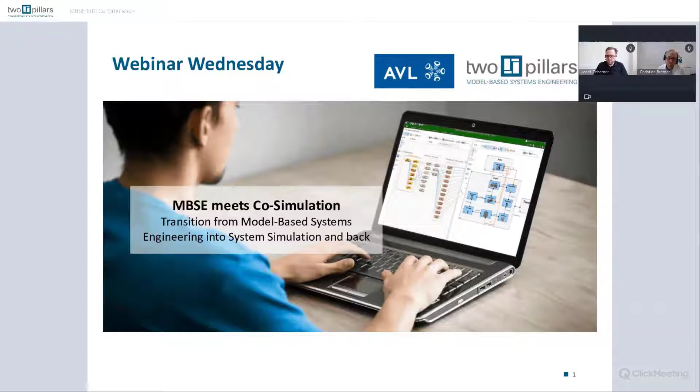The reason for this webinar is that we are actually asked by customers several times, how do we connect systems engineering with co-simulation, or simulation and test beds and this kind of thing. So we decided to investigate this topic and analyze a bit how we merge model-based systems engineering and system simulation. My name is Christian Bremer, I'm Managing Director at Two Pillars. And Joe, please, maybe you want to say a few words about yourself.

Thank you, Christian, and thank you for the invitation, and hello everyone. I'm from AVL, the largest independent company for development, simulation, and testing in the automotive industry, and also in other sectors. I'm chief engineer there, focusing on digital process innovation, so I help our customers introduce model-based development and virtualization, for example.

Thank you. All right, so let's have a look at the agenda for today. We will start with an introduction to MBSE and system simulation — what are our thoughts, what are our concepts. Secondly, the main part of this webinar shall be a demonstration; we will go into the tools, iQUAVIS and model.CONNECT, and show how this process and the integration work. Third, we will close this meeting with a summary and outlook about the next steps.

So Joe, maybe first give us an overview on motivation, from your point of view. Thank you, very short motivation here. When we look at the vehicle development process, or any product development process, we typically have this product-structure-driven level here, this upper level that we see.

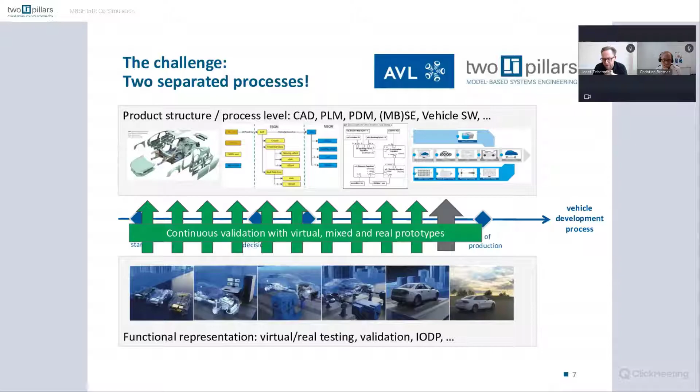Christian: Yes, so what is the general thinking? When we now place these two worlds, iQUAVIS and model.CONNECT, where are the connections actually? The first point, maybe the obvious one, is the system architecture. In iQUAVIS we have a system structure, a description of how the system works, and obviously we need to take this model and transform it into a system simulation.

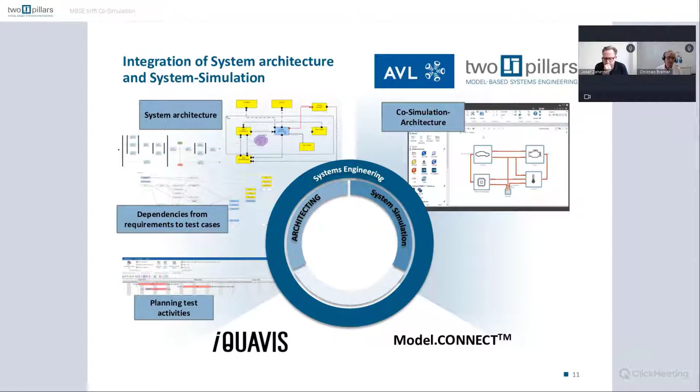However, looking at the practical process, we saw that the simulation model itself does not fulfill a purpose if there is not a question in the first place. We need a question or a test case that we need to answer in order to create our system model in the system simulation. So the second thing is that on the iQUAVIS side, we have the dependencies from requirements to test cases, and this is the knowledge we also have to bring into this consideration.

And third, we also have a dimension of planning these test activities — this is also a systems engineering task at the end of the day. It means we also have to integrate this into the loop of the system simulation by having an automated execution of these co-simulation orders. By this, we close the systems engineering loop, where we have the architecting part, the system simulation, and then the feedback. This is the idea.

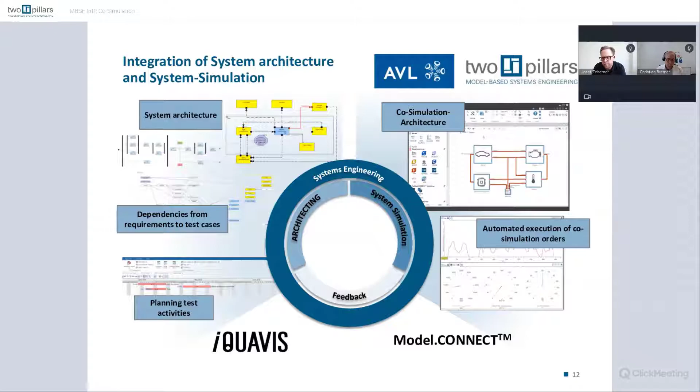Okay, and let me just tell us a little bit about model.CONNECT, or the co-simulation here.

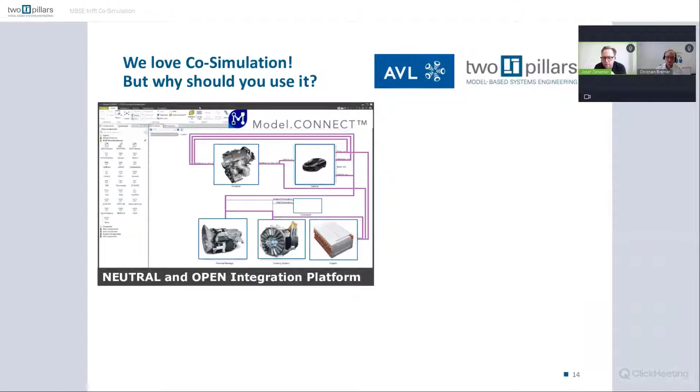Yes, we love co-simulation. We think that's the proper technology here, because co-simulation takes over this idea that we get out of the system architecture, out of the model-based systems engineering approach. We can use this modular concept, bringing together component simulations, building up what we call the virtual prototype.

And it's a very flexible approach, so we can connect different tools that are available on the market, typically used in your companies. It's more than 30 different tools that we are supporting here, but we're also supporting and driving the standards like FMI, functional mockup interface, distributed co-simulation protocol DCP, or the system structure and parameterization, SSP. We will also use this later in the demo, you will see this.

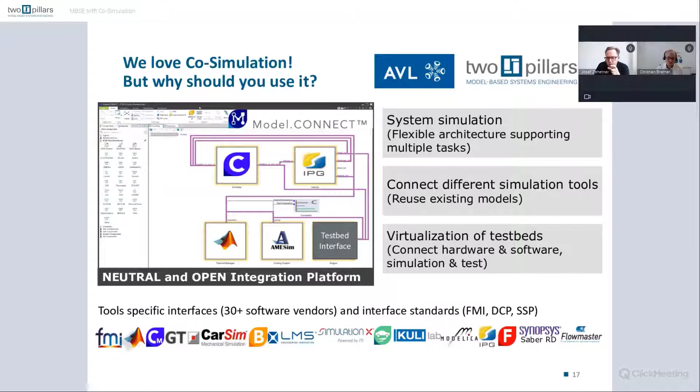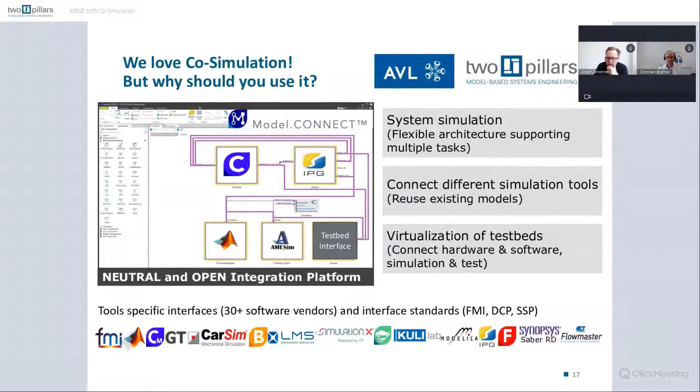And what we also can do with our co-simulation is we can even bring the test beds into the simulation. So we can connect our co-simulation to hard real-time systems and have methods and technology to do this. And yes, this model.CONNECT, or the co-simulation, is what we are using now in the demonstration later on. Christian, maybe you can explain now what we want to show.

So we will connect these requirements now to two elements, or model elements. First, of course, the test case. So we have to make sure that for each requirement there is a test case where we can validate this requirement. This is a general principle, we should test each and every requirement. And secondly, we will have a link from the requirement to the actual realization of this requirement, in our case the vehicle. We describe this vehicle typically with a system architecture, maybe a system structure.

Sometimes we hear words like mechatronic sketch. They describe how these modules that belong to the vehicle work with each other, what are the dependencies, and at the end of the day, how is the architecture described. So this is kind of the core traceability that we have as a system description. Of course, you will find in system architecture much more data, you will find functions, use cases, features, and so on. This is clearly also part of the system architecture, but for our consideration right now, these three data elements are the key elements, and this is what we will focus on in the demonstration.

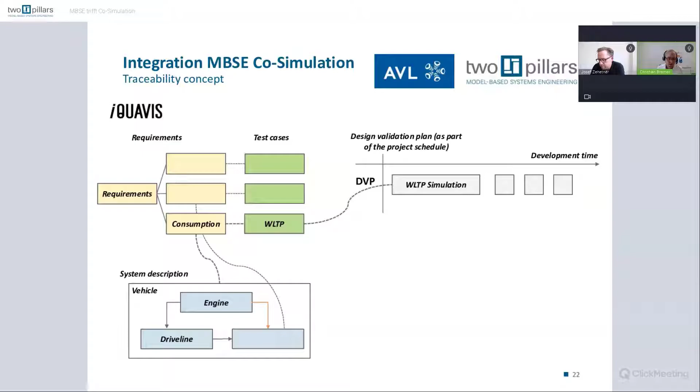And then what we have to do is realize these test cases. So we take the test case, the WLTP case in this scenario, and we bring it really into a schedule. At the end of the day, we need to schedule the test execution in a project plan, in this case a DVP, a design validation plan, and bring it into an order to make sure they're executed. So this is the project planning part.

And then at that point, model.CONNECT comes into place. It will take the system description, analyze how the system actually works, or how the architecture is defined, transform this into a co-simulation model, and then take the task, the WLTP test case task, realize it, and create a result. In this case, the energy consumption, and this data will be linked first to the test case, of course, but also to the actual task that has been executed. So this follows the very general principle that we define a test case and the test task first, even independent from where and how this test is actually executed.

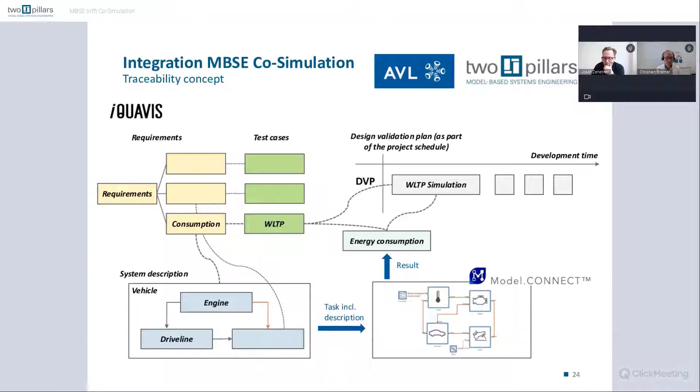This is like the second step then, so we bring back the result into the test case and the task. So this is the traceability concept. And now I would go into the tool and demonstrate to you how it will work.

So you see now iQUAVIS, and you will find here in this tree again this basic tree that we saw before. We have our requirements, our test cases, our entities. I want to show you very briefly the content just once again. So here we have this requirement that I just mentioned, the WLTP consumption. It is linked to the vehicle and also to the test cases. As I said, there will be more information in the whole system model, a lot of functions and use cases and so on. We intentionally focus here on this information that we need, and build views on the model, of course.

These requirements typically will be described also in a table where we have more information. Maybe we will find in such a table also a unit and other information. We here now have this requirement, first of all, just as a bubble.

Then we have our test case, WLTP in this case. Also here we will have more information linked. And we have then the link to the vehicle. Here in this case, we have the vehicle, we have these modules inside the vehicle.

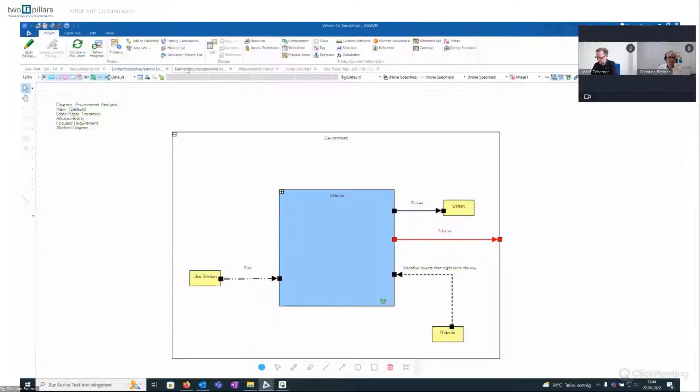And here I want to show you how this description is actually built up. So we have the VTMS, we have the engine, we have the driver, we have the driveline. These are the elements that we saw before also in the tree, but we have of course described the architecture. This will be taken then again by the model.CONNECT tool as a next step.

So what we want to do now is we want to confirm the status of the requirements. This is done here with this table, which is generated automatically. We'll see here our requirements, as again this WLTP requirement, it has a certain value to be fulfilled.

Right now, the status is negative. We have our test case allocated, and then we have the execution. Right now, we have here one experiment we set up for test purposes is 0, and we have defined here the task. This task comes from the schedule chart. Also, this is a part of iQUAVIS now where we schedule the activities and especially, of course, schedule the test tasks.

So in this case now, again, we focused really on the information we want to see. We have the DVP here, and we have here our task. Right now, this simulation task here has not been started.

So I will do this now. I will start the task and set the status here to ongoing. And by this, I will trigger now the server to check for information on the server.

The model.CONNECT will check the iQUAVIS server and asks for tasks that have not been completed yet. So it will see, okay, there is a task that we need to perform, and it will generate the model and realize then this simulation, execute the simulation and create a result.

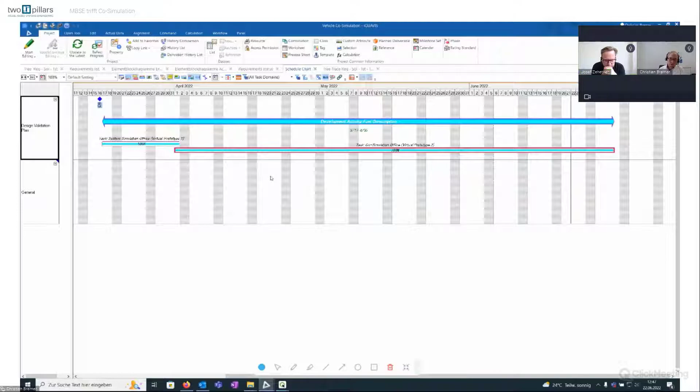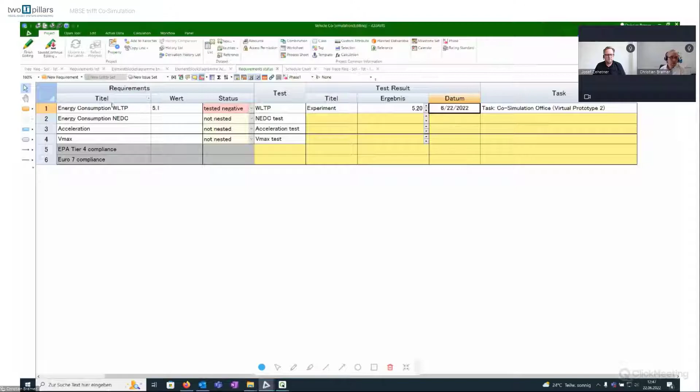So there must be a new result, and I will go back to my requirement status. And I see here now there's a result 5.2 coming from this date today. So what I have to do now as a last step, maybe in iQUAVIS, to start editing and save one time to apply my business logic.

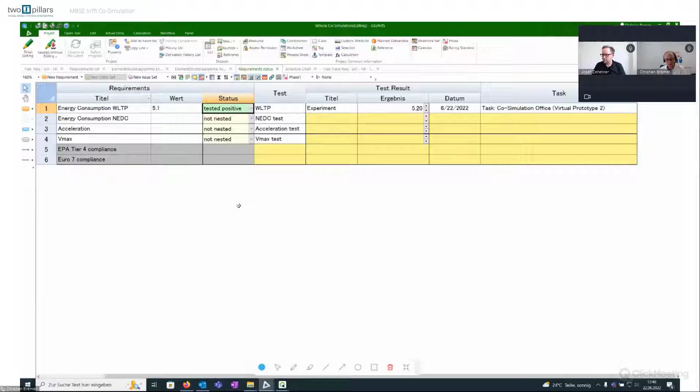And then you will see, okay, the test status of this requirement has been set to green, positively tested, so it is confirmed. By this, we will get back the result of the test case. This is also visible here in this traceability tree.

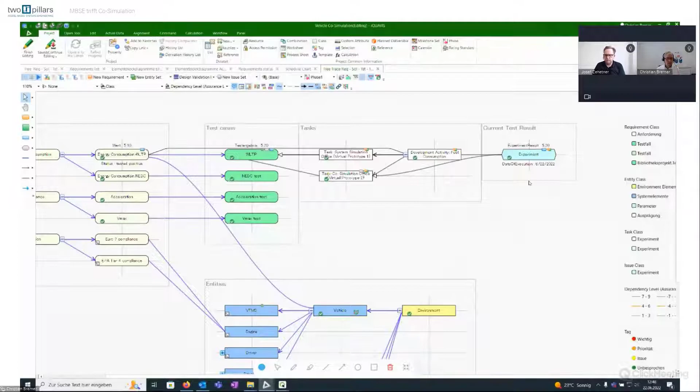Okay, so this is the iQUAVIS part, and I will go back to the presentation and hand over then to Joe. Maybe you can give us some insights into what's happening in the Model.CONNECT world. Sure. And finally, it worked.

So we can now show what we actually did there. And Christian already mentioned this a little bit. So now this co-simulation workflow got a little bigger. So we get this information and there is a new task to perform.

We download, we get the system architecture. And what we are doing with it is we convert it into SSP. This is now the standard that I was referring to already before. And this one now describes the co-simulation in a standardized way. And this one we import into model.CONNECT, can then perform the co-simulation, apply post-processing.

So we do not report back now the time charts, but we calculate using a Python script here a KPI, a key performance indicator, and this one we report back to iQUAVIS. But we also store this KPI on our side with necessary traces, so which models were used, which test definition, for example, was used, so that we always can repeat the task and have full traceability.

And additionally, as you have seen, we report back also a unique ID, a date and time, and we set this state to finished. And let me also share my screen, just give you a very short insight into what is happening now in the background there. So this SSP, what we are generating, you should see now my screen.

And then when we go to model.CONNECT, what you can see now is the model.CONNECT user interface, and we can import this SSP, which takes a short time. And then you will see we have the full co-simulation configuration in here. Of course, there's a lot of additional information, but all these blocks here, they contain now the models, in this case, really a functional mockup unit.

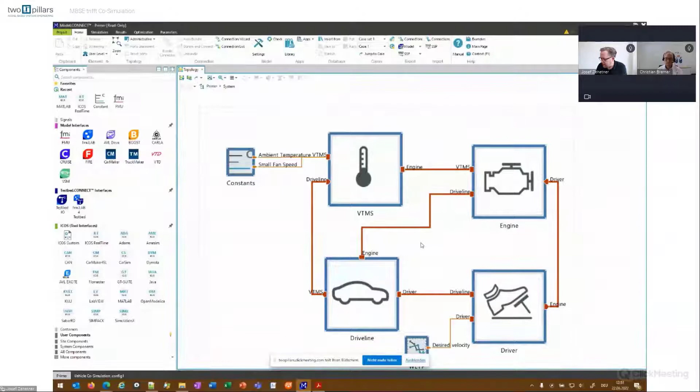Normally, our co-simulation projects look like this, a little better organized. But in this situation, of course, no one actually is interested in the user interface, because in the end, all this task is run completely automatically, as you have seen before in the demonstration from Christian. We just wanted to show you what is actually going on there in the background.

And also maybe as a comment, we are not limited here to functional mockup units. We can use any kind of simulation tools that are maybe then stored in model databases. We will come to this later, and so on. So we are very open here.

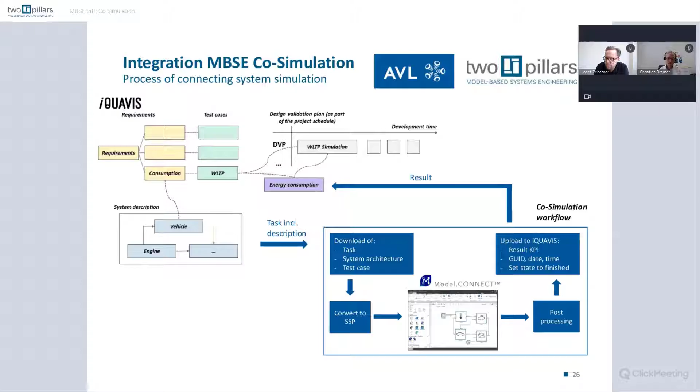And that was the information on the demonstration. And Christian, you have a little more also in the direction of libraries. I think we have a little time left.

So what we show to you right now is really this very basic overview and the concrete use case: how would you work with it? Behind there is of course a more complex concept also, because as you can imagine, you don't want to create an architecture from a new system from scratch and also derive all this simulation data from scratch, but you will work based on libraries. And this is what is described here.

And I can only, again, in this webinar, discuss it very briefly, but still to give you this information, there is this concept that we have a library for the system architecture, where we see maybe the driveline and the engine in this case, they are defined. They have ports and so interfaces, this is all defined. They consist of parameters, maybe the curb weight or other kind of parameters. And they are also linked to simulation elements that can be put together later on into a simulation.

This is part of the library. And then if you go and set up a project or start a project, then you take these model elements, of course, the driveline and the engine, you bring it into a specific context by linking it to each other using the interfaces. You will then, secondly, also define your parameters, so we will set the parameters with certain values.

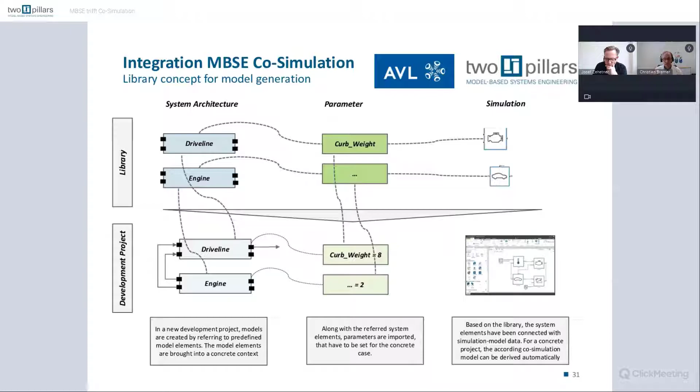And then a third step, based on this, the actual co-simulation will be generated, again referring to the library concept where we have this linking. And this is also necessary, of course, to then derive the simulation model in a way that it really fits together and can be executed in a way that it answers at the end of the day the test case.

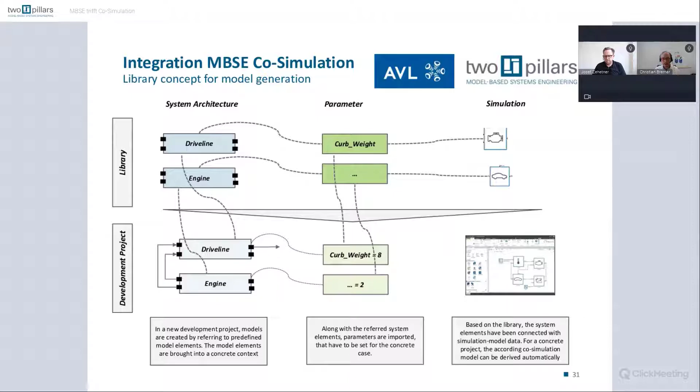So again, brief summary, brief explanation of this library context. There's more information and structure behind, than we could show in this very brief webinar. And this brings us already now to the conclusion. Joe, maybe you want to summarize the webinar. Yes.

What we showed you was really a solution now for the problem that I have shown you in the beginning, this challenge of the separation of the process or product structure driven process with this functional representation. And we think it's very relevant that we use here the system architecture as central element that holds all this information together. And out of this, we derive the co-simulation configuration now. So we really link the co-simulation very closely to the system architecture, meaning then to the complete process level there.

And with this, we can now really do a continuous validation. We can even use this configuration then to go to the test bed. We can replace the virtual e-motor, for example, by a real e-motor operated on an e-motor test bed. And so that's a very important linkage methodology that we are using here, linking methodology.

But furthermore, what we have shown to you was that this planning aspect is very relevant, that also this definition of the test cases, they are coming out of the requirements, and that we again here establish this link via the system architecture, via the MBSE description that we have here. And the system that we have shown to you, this demonstrator, we are using REST APIs here. So we could actually start implementing this system on your side if you're interested right away.